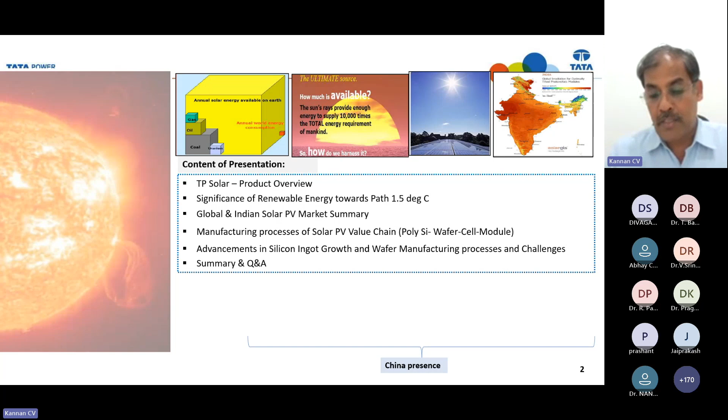Then we will get into the manufacturing process of the solar PV value chain, particularly ingot and wafer, and then the different advancements happening on the ingot side and wafering side. So let me show my slide. Sorry.

If you look at the bottom side, when you talk about solar value chain, normally most of us saw many panels installed either in the field or maybe on the roof of the house. But before the panel installation, there are so many processes involved.

When you talk about the solar PV value chain, it starts all the way from quartz, a material that's SiO2. From quartz, it will be converted into low pure metallurgical grade silicon. Then the low pure silicon will be converted into very high pure silicon through different chemical processes. Then it will be converted into crystal shape, either cylindrical form or square shape, depending on what kind of growth methods you are using.

Then these crystals will be converted into wafers, with different sizes and thicknesses, and these wafers, or substrates, will be converted into the semiconductor device, like a photovoltaic PV cell. Then the PV cells are stitched together to convert into the photovoltaic module, or panel. Then these panels will be installed into the field. So the entire stream we call the PV value chain, starting all the way from quartz to the PV module which you all are seeing in the field or on the roof of your system.

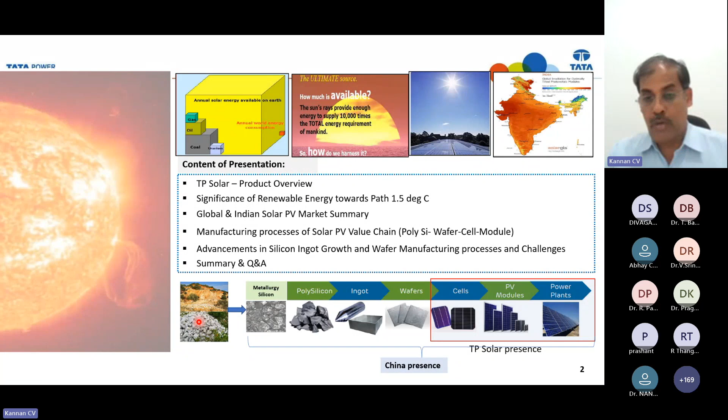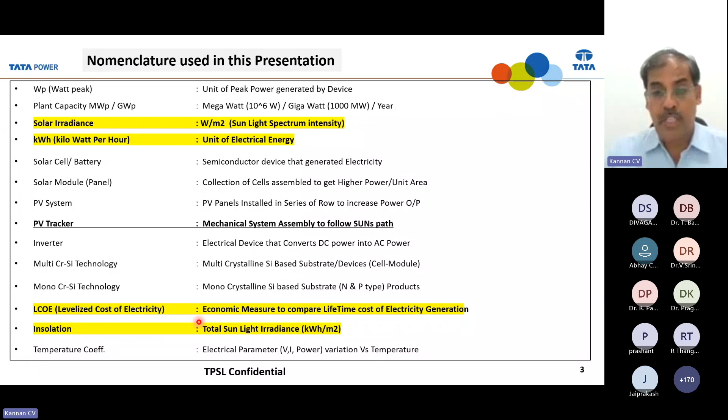Before I get into the subject, I want to say a few things about TP Solar, which I'm associated with right now. Tata Power Solar is almost 25 to 30 years old, one of the oldest companies in India, where PV cell and module manufacturing started in 1991, along with BP, British Petroleum, as a joint venture. Since then, they have been in solar PV manufacturing in terms of cell and module, with the oldest factory in Bangalore.

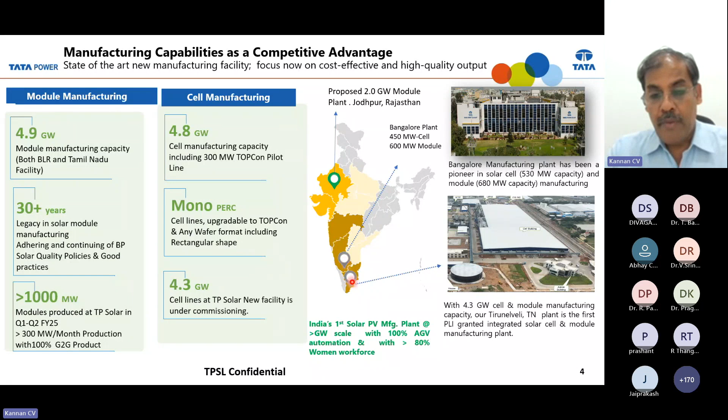Recently, that capacity was only 600 megawatt. As part of the expansion plan, management set up India's largest single location, 4.3 gigawatt cell plus PV cell and module manufacturing facility in the southern part of India, close to Tirunelveli, close to Kanyakumari, just 100 kilometers north of Kanyakumari. We are also planning to set up another 2 gigawatt, meaning 2000 megawatt, of module manufacturing.

Whenever I say capacity, it means annual capacity, the plant can generate 2000 megawatt of equivalent panels produced in that facility per annum. This 2 gigawatt facility is planned for Jodhpur in Rajasthan, where the end use market mostly lies in Gujarat and Rajasthan, so management decided to set it up there. The top one is the Bangalore facility, the oldest, 30 years old. The bottom one was recently built, just a few months before, covering almost 300 acres of land on the highway.

This is one of the first solar PV manufacturing plants at gigawatt scale with 100% automatic guided vehicles. Normally, most solar plants have manual operation, but this is the first plant at the entire 4.3 gigawatt scale that is completely automated. Another important thing is the 80% women workforce; we have almost 2,500 to 3,000 employees there.

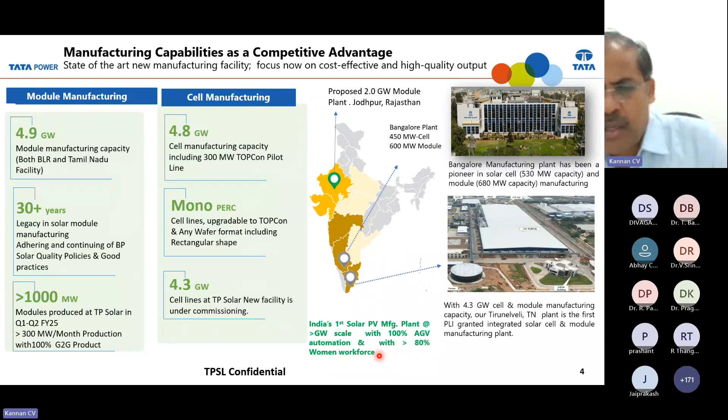Out of the 3,000, almost 80% is women workforce, all from the nearby districts. This indicates how Tata is empowering the local area through women empowerment, and also providing jobs for the local community.

So these are the different products we are offering in the market. Maybe 5-6 years before, each solar panel could produce around 300 watts per hour. But because of a lot of technology development and product design change, the 330 or 360 watt panels have now become close to 650 to 700 watts. A similar module size now produces almost double the power, which indicates that power density has doubled. So in the same area where a panel generated a certain amount of power before, now it can generate double that power. A lot of technology development has happened.

If you see the half-cut 144 cell design, I'll discuss that later. As you add different numbers of cells, power generation automatically goes up. Half-cut means normally the cell is square shaped. Recently, instead of a square shape, the industry is moving towards a rectangular shape, so that you can pack more wafers and cover more silicon area in a small space, minimizing empty spaces. Using rectangular wafers increases packing density, so power generation becomes higher. A lot of developments are happening, and the wafer area keeps reducing one by one.

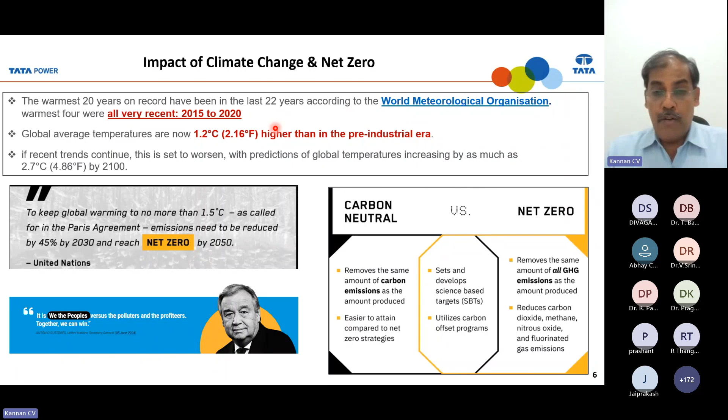Even if we're optimistic, with governments putting a lot of effort and setting targets, if everyone achieves their target, it will probably bring the temperature down to 2.1 degrees. But reaching 1.5 degrees certainly requires a lot more effort beyond the commitments given by various countries. Right now, in 2025 itself, there's already a huge gap. We're supposed to reduce greenhouse gases to achieve 1.5 degrees at a certain rate, but we are at almost double what is supposed to be.

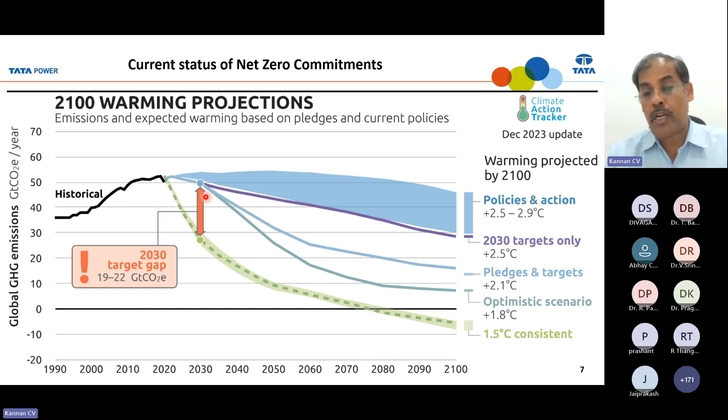A lot of combined effort is required to bring down greenhouse gas emissions so that the overall global average temperature is controlled at 1.5 degrees, so that only then can the next generation survive. To reach carbon neutrality or net zero, by 2030 greenhouse gas emissions are supposed to be minus 45% compared to 2010 levels. But actually, instead of minus 45%, we are already at plus 9% of our target. This indicates we are not aligned with what we committed to in the Paris Agreement and other climate agreements. Everybody talks about it, but reality isn't happening.

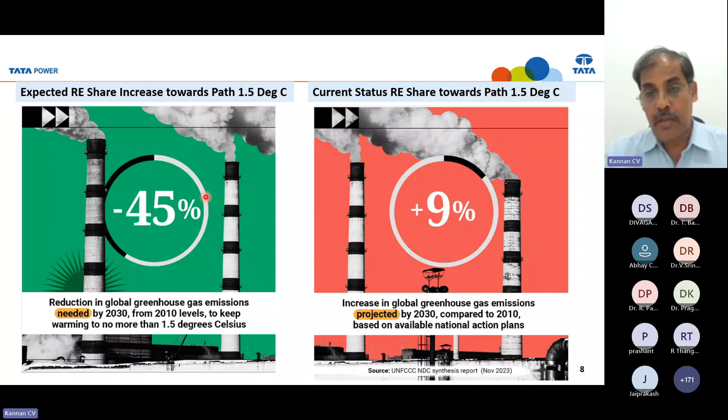If we continue like this, we probably cannot maintain the temperature at 1.5 degrees. It may go to even 2 or 2.5 degrees, and then we may expect a lot of natural disasters in coming years. Now, this is the overall energy resource.

Whatever electricity we are using right now, what are the different sources used for generation of electricity? Currently the major electricity generation source is coal, almost 30 to 40% coming from coal and natural gas or oil. All these are fossil fuels.

Only maybe 8 to 15% maximum, including nuclear, comes from renewable energies. But going forward, maybe after 20 or 30 years, we may expect the renewable energy share to go beyond 40%. That's what everybody is predicting.

But even if you go with 41%, 50%, or 70% renewable energy, still the amount of greenhouse gas emission cannot be brought down to the level needed to achieve a global average temperature less than 1.5 degrees. So the graph on the right clearly indicates how much greenhouse gas is emitted per unit of electricity generation by different sources.

For example, with coal-based electricity, for each unit we consume at home, coal generates close to 0.8 to 0.9 kg, almost close to 1 kg, of carbon dioxide released to the environment. Similarly for oil and natural gas.

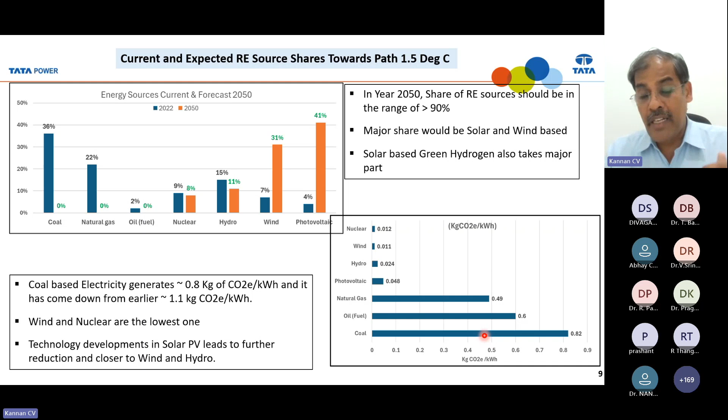And even by doing this, it's very difficult. It's predicted that it's not easy to bring it down to control at 1.5 degrees. At least they're trying to control it at 1.5, maximum 2 degrees. This certainly needs a combined effort from everyone to maintain that global average temperature less than 1.5, or at most 2, degrees.

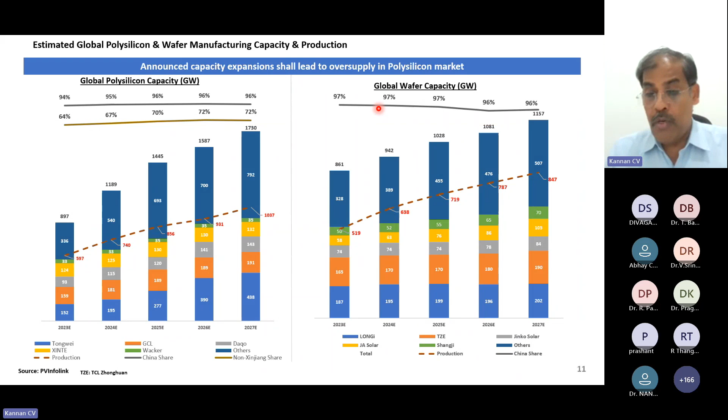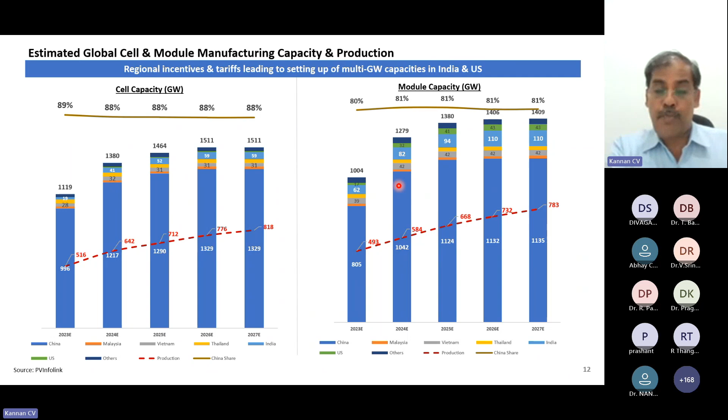Unfortunately, none of the countries other than China have the entire value chain. India, of course, has solar cell plus module, but we do not have the backward or upstream products like polysilicon and ingot. Recently the government has been pushing a lot of effort and investment into upstream products like polysilicon, ingot, and wafer, but that is also getting delayed because of various reasons.

Overall the module price has come down so that many people can afford the installation of solar photovoltaics. The overall solar module price has come down, but still it's driven by China. So one way it's good for the installation purpose - you can buy the module from China and install it.

But when we are getting this much low price, Indian manufacturers are not able to meet it because of volume - they have 90% volume, we have only 2% volume. So it becomes a volume gap. Whoever has more volume can control the cost. That's what's happening in the industry.

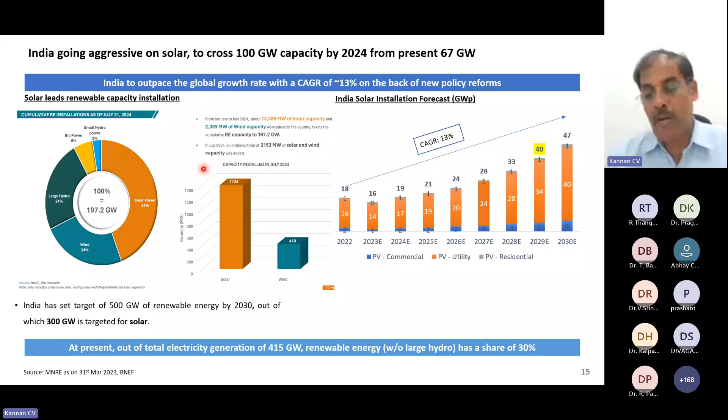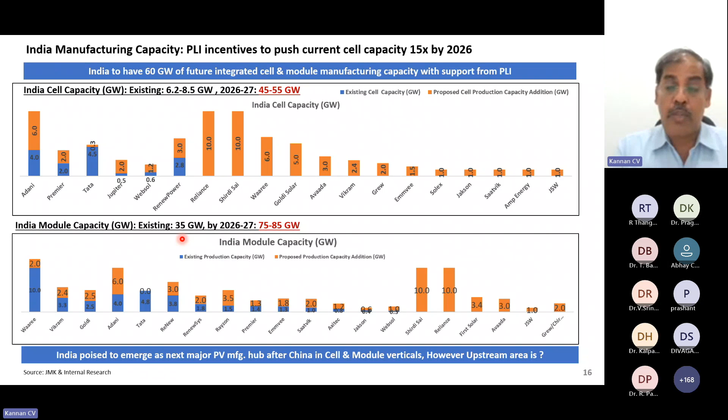The government is pushing a lot of effort to improve the local manufacturing capacity of both solar cell and module, and wafer also - but there are still a lot of challenges to enter into the upstream, or we can say the wafer and polysilicon products, which are capex intensive and also power intensive. India's electricity price is one of the highest, but those upstream products need very low electricity price, where China gets subsidized electricity. That's why they are able to produce at a lower cost.

What are the different technologies or growth methods available to grow a good ingot? Then what are the different slicing mechanisms, how to prepare a good wafer, and what is the importance of wafer quality in the overall performance downstream, like cell efficiency - how wafer quality improves overall cell efficiency.

And if the efficiency of the cell is good, then the module watt power also will be very good. Then when you install those modules in the field, your generation also - you can generate more electricity. So today and tomorrow we are going to talk about only ingot and wafer.

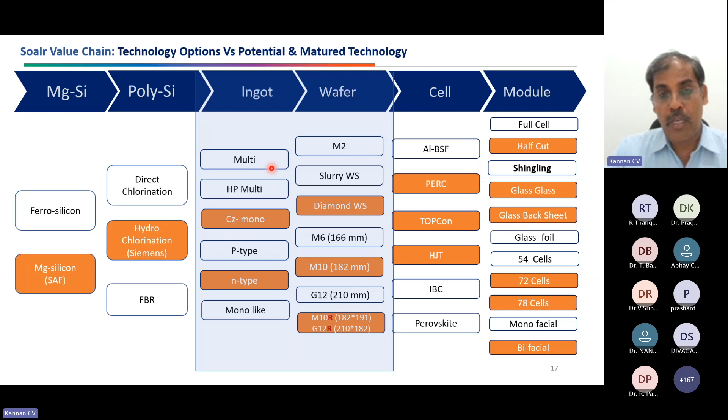When you talk about ingot and wafer, there are 3 different types of wafers available. One is monocrystalline wafer, another one is multi-crystalline wafer, and another one is amorphous silicon. So today we are going to talk about only

crystalline. If you look at the overall PV industry, there are some thin film technologies available, and panels can be produced through thin film, and panels can be produced through crystalline silicon wafer.

So when you talk about crystalline silicon, there are 2 types of wafers. One is polycrystalline, or you can say multi-crystalline wafer, and another one is monocrystalline wafer. You all know the difference between amorphous, multicrystalline, polycrystalline, and single crystalline.

Polycrystalline is nothing but a combination of small monocrystals, whereas in monocrystal, the performance or characteristics of the entire wafer are the same and in a single direction. Whereas in multicrystalline, the wafer orientations are different, so the performance parameters and characterization of the individual crystals are different. So the overall performance of multicrystalline is relatively lower than monocrystalline.

Until a few years before, multicrystalline was so dominant in the market, but because of multicrystalline having a lot of grain boundaries between the crystallites, there was some limitation in efficiency. As technology advances, they need very high quality wafers to drive efficiency further up. Multicrystalline has some limitation because of grains or grain boundaries, whereas monocrystalline is a single crystal, so there is potential to improve efficiency further. Because of that, now the industry is moving towards monocrystalline wafer based technology.

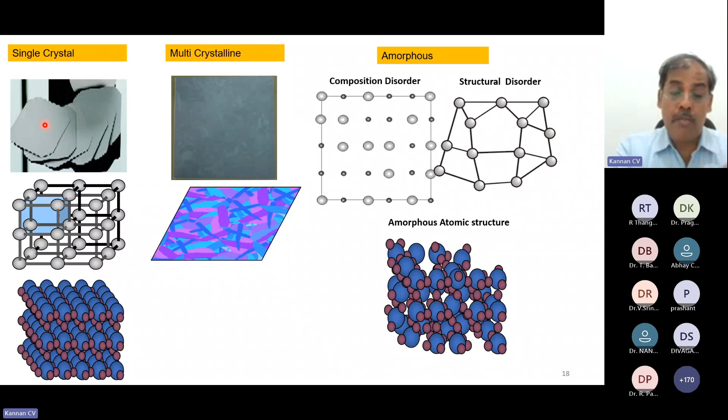Of course, thin film amorphous based technology is also available in the market, but still the overall conversion efficiency and module power is not competitive to crystalline based technology. So 95%, 96% of the overall PV market lies in crystalline silicon, either polycrystalline, multi, or monocrystalline, mainly dominated by monocrystalline technology because of the efficiency increase.

And even within monocrystalline silicon, there are two major techniques. There is the float zone technique, and another one is Czochralski, which is the major dominant technique available in the market.

And if you look at multicrystalline, there are two more techniques like ribbon growth and casting, or DSS, directional solidification system. So these are the four different methods normally available to grow crystalline silicon wafers, but mainly dominated by Czochralski, because you can grow monocrystalline through this technology.

For high purity monocrystalline, you can grow it either through the Czochralski technique or through the float zone technique. Mostly the float zone technique is more pure.

I think in the previous presentation, one of the audience raised the question about which technique can produce very high pure crystalline silicon substrate. So here is the answer: the float zone will produce very high purity quality, and mostly they are used for semiconductor applications, where IC chips and fabs need very high quality and less amount of oxygen and other impurities.

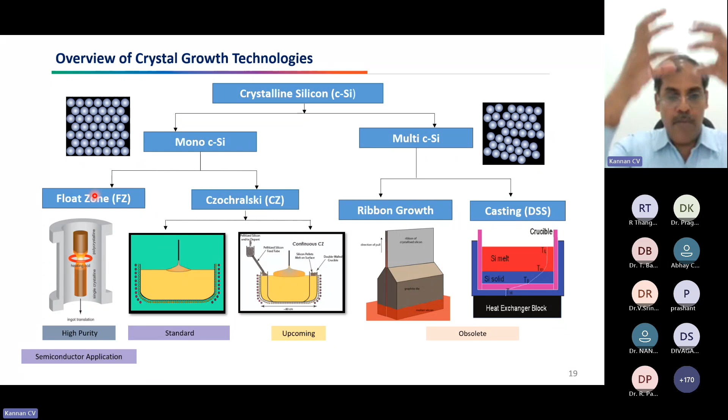The float zone technique can grow very good purity because you are not using any kind of crucible or any material to pour the polysilicon raw materials into. There is no crucible, so it's non-contact. Whatever raw material you have will automatically be converted into crystal in a very pure form, with no contamination from other areas.

Whereas in the Czochralski process, we will go in detail into what is the Czochralski process and what are the different steps in it. I'll come to that in the next slides. The Czochralski process is the major dominant process, and it's been in the industry for more than 70-80 years.

And even within Czochralski, there are two approaches: one is the standard process, the other is an upcoming process. Standard process means normally when you load the material, you melt it and start pulling the crystal—earlier, standard meant only one fill gives you one crystal. Now, because of technology advancements and cost reduction activities, you can grow multiple crystals from one crucible. A crucible is a small quartz-based container where you pour the material and heat it to 1400-1500 degrees. Instead of one crucible producing one crystal, now one crucible can grow multiple crystals.

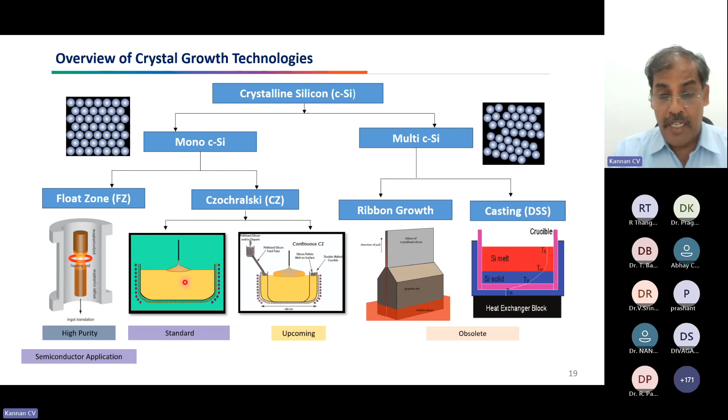So that they maintain the melt level, you can continuously grow the crystal, then pour the material and melt it, so that you can maintain the melt flow and solid-liquid interface level, where you can grow multiple crystals. That way you can minimize the downtime, and produce many crystals in a small period of time. In that way, your productivity will improve automatically.

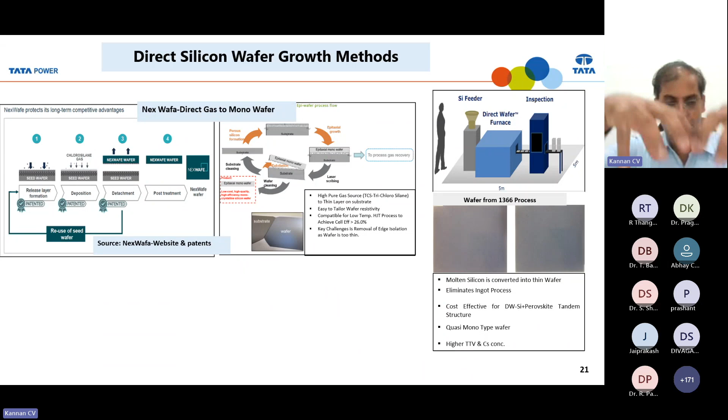Another technique: instead of pouring polysilicon into a crucible, melting, and converting into crystal, there is a technique from the US. One company was trying to establish a new technique called direct wafer. Without any crystal, just pour the polysilicon, melt it, and spread it on some substrate, then take out the wafer. You can maintain the thickness and those things. Once again, you can grow whatever shape you want, whatever thickness you want, but unfortunately, you cannot grow very high purity monocrystalline here.

You can grow it once again only in multicrystalline format. As I said, multicrystalline has a limitation in terms of efficiency. You cannot go beyond a certain size, right? Quality also, you cannot increase the quality. So these are the different techniques available in the crystal growth areas.

All are wafer, crystalline wafer, through CZ Czochralski, just using high purity polysilicon material, then converting into a wafer with different size and thickness. And here, using gaseous methods with different gases like silane and trichlorosilane, you dissociate silane into silicon and H2, then deposit that silicon onto a different substrate, and after a certain time you can take out that thin substrate and use it for further processes.

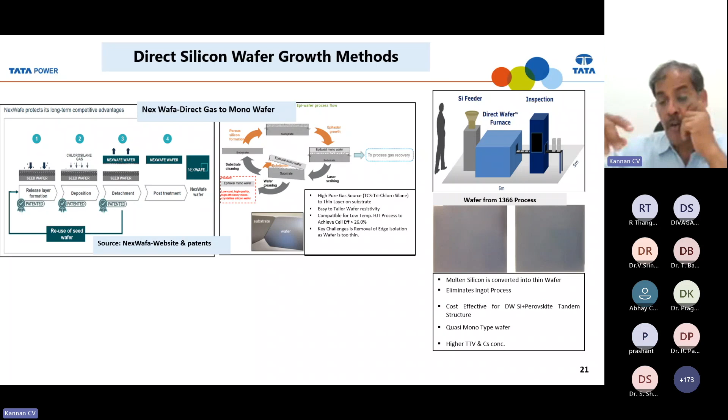Another technique is from a company called 1366, where instead of converting into a square shape, it's cylindrical—directly melt it, pour into the substrate, then take out the wafer. But unfortunately, it's a multicrystalline format, so you cannot use it for high efficiency technology. Every technology has its own pros and cons, but these are the broad level of different types of technologies available in the market.

When you talk about DSS, we will go into that. We're not going to discuss all four technologies—we talk about only two. One is directional solidification, and another one is the Czochralski process. So here we are talking about the directional solidification process and how it works.

Directional solidification means there is no pulling process. So there is a crucible, and the high purity polysilicon is loaded. The purity of silicon will be 9N, 10N. When I talk about N, it means 99.9999% purity—that much of purity. Ultimately, we need 100% purity, but you cannot achieve 100%.

The previous low quality silicon will be 99.5% purity. That 99.5% purity silicon will be converted into 9N or 10N purity high purity polysilicon through chemical processes. Then this is loaded into the crucible, which is a silica crucible. There is a susceptor to protect the crucible from deforming and getting damaged. Then it is loaded into the furnace, and the furnace gets heated. The polysilicon material inside the crucible gets melted, and after that there is controlled cooling from the bottom.

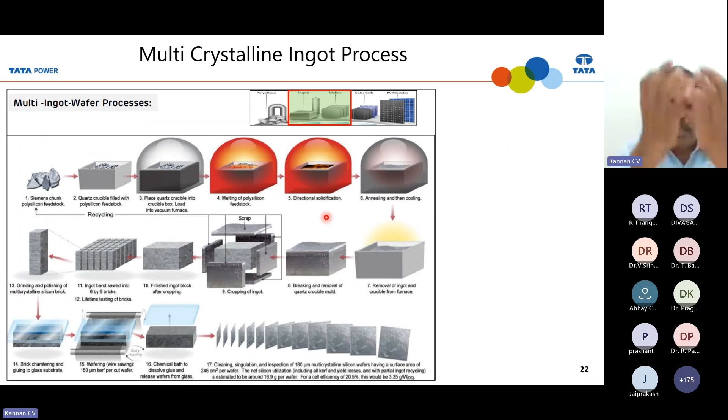After melting, there is cooling from the bottom—there's a cooling mechanism at the bottom side. So crystallization starts from the bottom, then the interface moves from bottom to top. The solid-liquid interface moves from bottom, slowly, because we are extracting heat through the bottom through some cooling plate. Because of the temperature gradient, the bottom side becomes crystalline and the top side remains molten. That solid-liquid interface moves from bottom to top, and automatically the crystal grows from bottom to top slowly, something like that.

Since it's a sudden cooling from the bottom, you may not expect pure crystalline growth. It will be a multi-crystalline format, because you are molten the complete silicon, then suddenly you start cooling. So you may not expect a good crystalline nature on the bottom. There will be a multi-crystalline nature generated on the bottom of the crucible.

The multi-crystalline crystal will start growing like this, so that there will be a columnar growth all the way from bottom to top. In this case, you can load more amount of crystal, because based on the crucible size, you can mix more raw material. Also, you can grow a big crystal, then cut according to whatever wafer size you want.

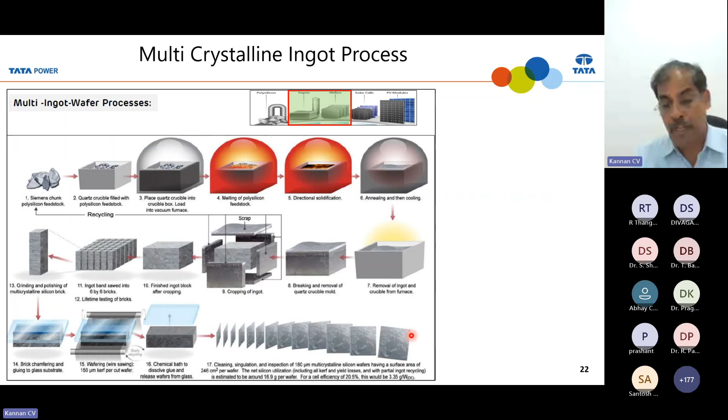So if we see this one, here's another way of schematically looking at it. You have to load the polysilicon into the crucible. Then after melting, you just extract the heat from the bottom, so automatically the molten bottom side will become solid.

Then you keep on extracting the heat from the bottom side, so this crystalline interface will move from bottom to top. So this crystalline columnar growth will start, and finally you will get a crystal like this. Then maybe some small poor quality material will be underlying this one.

So we have to cut all the sizes, then convert into bricks. Then you have to slice the brick according to the wafer, and you will be getting wafers like this.

There is a cooling chamber. This is the chamber where the cooling water, 18 degree cooled chill water, is flowing with high flow, high pressure. It flows on the chamber, and during the melting process, the chamber is completely isolated through this heat insulated mechanism. This is completely packed, so no heat will pass through.

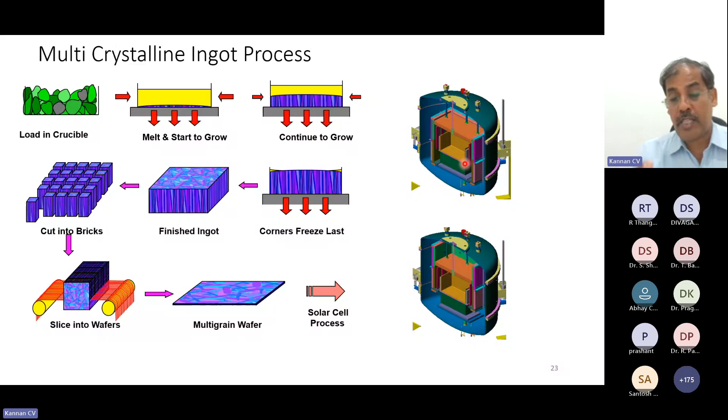That's why this DSS technique is getting phased out from the industry. Now almost 95%, or you can say 99%, of crystalline silicon wafer crystal manufacturing happens only through the Czochralski process. This is one of the important processes in PV, and not only PV, even in semiconductors. When you talk about silicon or germanium, most semiconductor materials are grown by the Czochralski process.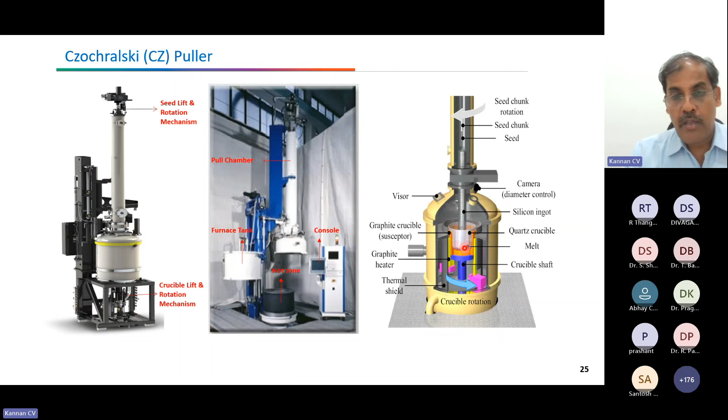In the previous DSS process, there was no seed used. After complete melting, you started cooling from the bottom, extracting heat from the bottom so that growth starts from bottom to top. Whereas here, after melting, a seed crystal, a mother crystal, a small seed, is inserted into the melt. Then the equilibrium gets disturbed, and the melt starts attaching to the seed. You have to pull this seed in a controlled way with rotation, and at the same time, the crucible also rotates in the opposite direction.

So by pulling speed and rotation speed, crucible rotation, you can maintain the diameter. What is the size you want? What is the length you want? Everything you can control through pulling speed and rotation, and also crucible rotation.

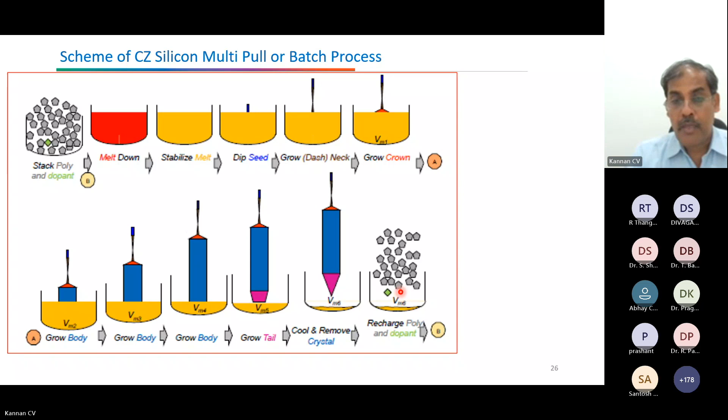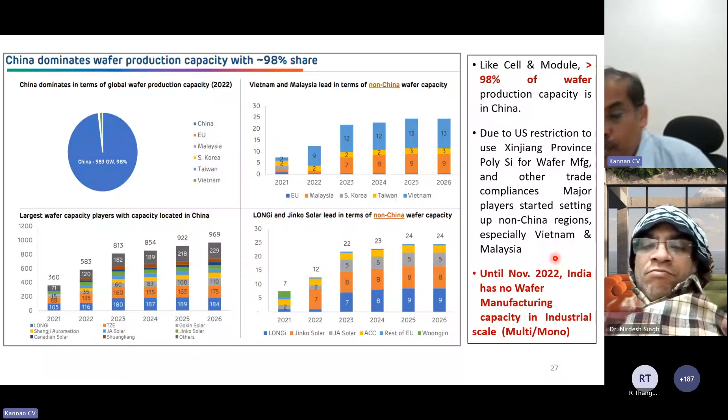Until November 2022, India had no wafer manufacturing capacity at industrial scale. Only a few countries other than China, like Vietnam and Malaysia, started some wafer ingot manufacturing. But once again, Chinese players set up facilities in Southeast Asia because of the US government putting a lot of restrictions on Chinese imports. That's why Chinese companies set up facilities in Southeast Asian countries like Vietnam, Thailand, Malaysia, and started producing ingot and wafer there. Unfortunately, India had no manufacturing facility for ingot wafer until 2022.

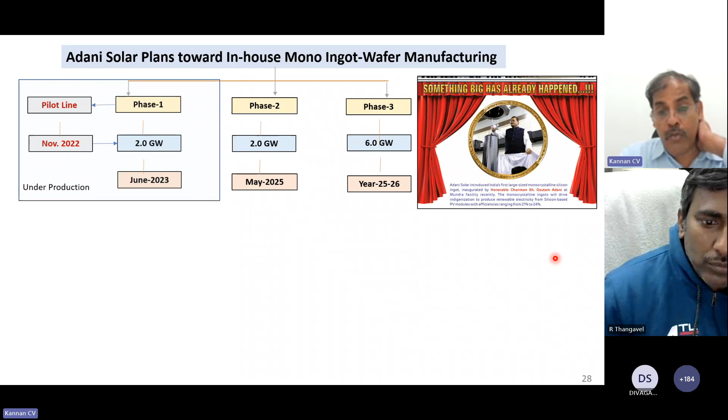But after 2022, the first player, Adani Group, started investing in India's first gigawatt-scale wafer ingot and wafer manufacturing facility in Mundra, Gujarat, with 2 gigawatt equivalent capacity. Around January-February 2023, India's first industrial-scale crystal was grown for the first time. Before that, many institutes and laboratories in India had grown small-size crystals, but this was 4-meter length and 300mm diameter industrial scale, producing current wafer sizes of 210, 182, whatever the industry uses. So this was first grown end of 2022 or 2023 - India's first large-size industrial crystal.

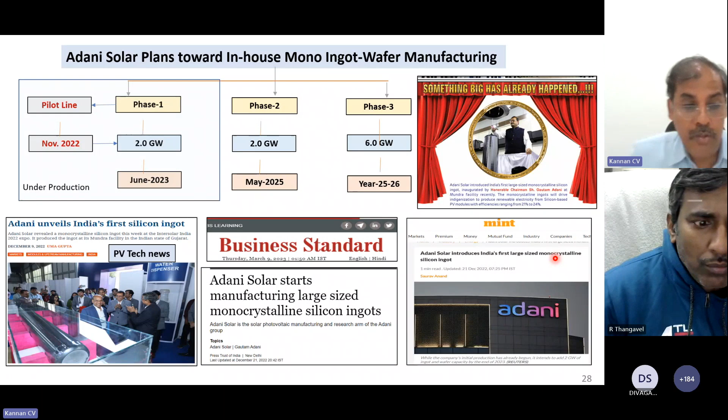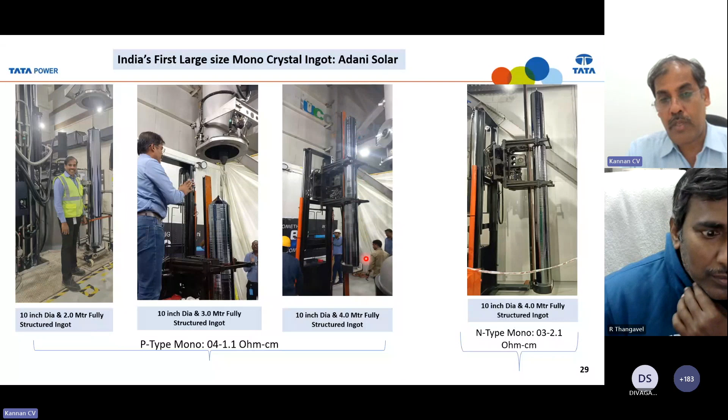Shall I continue this one? How much time do I have? Still 20 minutes available, sir, if you like. If you like, you can continue, otherwise you can move to question and answer. I think maybe I can continue tomorrow also, if someone wants. Yes sir, we will have some discussion. The talk is open for discussion.

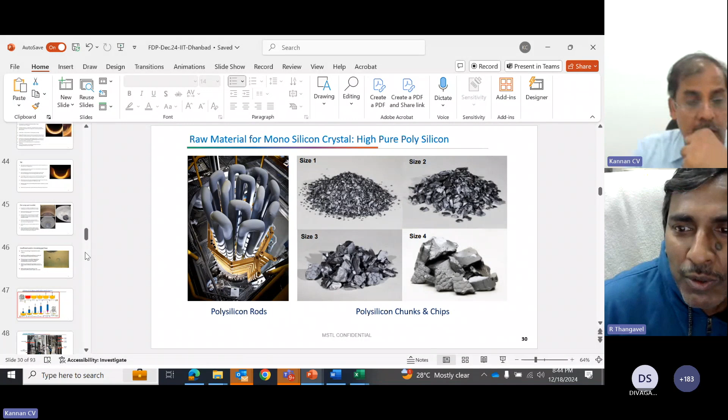Still, hello? I have so many slides. Yes sir, yes sir. Sir, hello Dr. Yeah, Riyaz please sir. Yes Riaz, tell me. Yes, so I have a small query, excellent talk sir.

I have a small query about the solar waste. How is the government projecting to maintain the solar waste, because nowadays everybody is setting up solar cells, but after 5 or 10 years, silicon solar cell waste material will be one of the biggest problems.

So how is the government focusing on solar waste?

Yes, I think this is one of the major concerns, like electronic waste, not only solar waste. Overall e-waste, that's the next big industry, like renewable energy. So we are talking about more renewable energy, more electronic industries. So the other way, how are we going to reprocess after 25 or 30 years of life, end of life? Unfortunately, in India, solar panel installation started only a few years before, so we may face this problem after 10 or 15 years. But some Western countries who installed these panels 10 to 15 years before may face this challenge very soon.

So globally, internationally, people are also working on how to recycle this. There are a lot of recycling mechanisms already established, but not 100% well established—there are still challenges in terms of cost optimization. In India too, a lot of research is happening at the university and institute level, and the government is also putting in a lot of effort on how to recycle these panels.

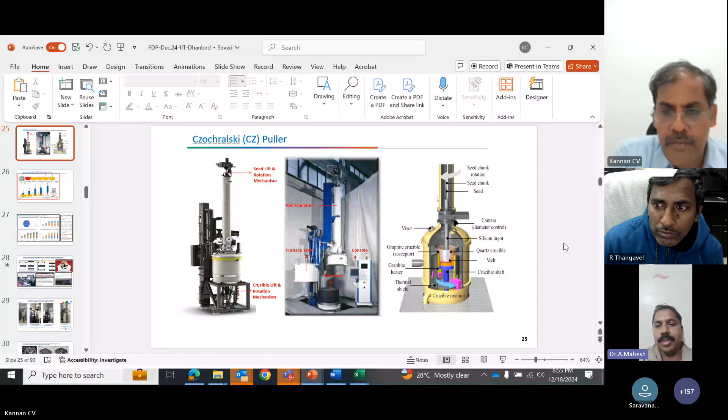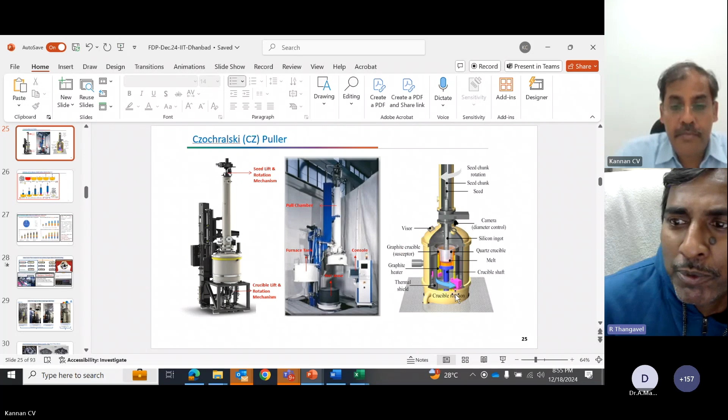Thank you. Any other question from the audience? Sir, some audience have given chat box questions. Dr. D Bharaniraj from Government Arts College, Ariyalur asks: Is there any particular orientation of the crystal wafer that has maximum efficiency?

For solar cell applications, the 100 orientation is the best and is normally used.

Okay sir, then another question from chat box, Sandhya Gupta asks: In the multi-crystalline ingot process, is there any possibility of dislocation presence in the grown crystal during the cooling process? If dislocations are present, how can they be removed?

See, that is the reason - dislocations cannot be avoided because you are doing forced cooling. Since you melt it and then force a cooling mechanism, unless you do it in a very controlled way, there are chances of more dislocations. But of course you can also improve dislocations through a process called annealing.

After you grow the crystal, you do heat treatment once again. You heat it to some 70% of the growth temperature - growth is 1300-1400 degrees, and if you heat it to 700-900-800 degrees, there is a slight reorientation of the crystal grain, so it will improve the performance to some extent but not fully. You cannot compete with monocrystalline, but you can slightly improve the overall efficiency.